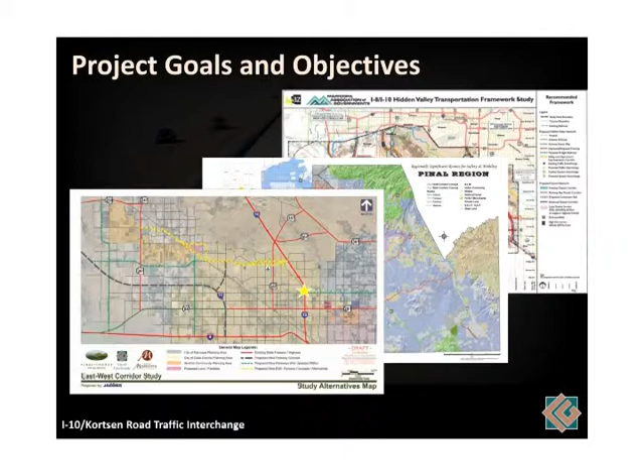It starts with various planning studies. Regional planning studies, such as the Hidden Valley Transportation Framework Study, look at general improvements in the area. The Pinal County Regionally Significant Routes Study is another study done by the county that looks at major improvements to the roads and streets. These documents are developed in conjunction with all the agencies, so Casa Grande, Maricopa, all the different communities are participating in how these planning documents are developed as to where the ultimate infrastructure will be located throughout the community.

Other studies we've worked on include improvements. Some of you may have been involved with some of our planning meetings for the east-west corridor. It's a parkway that's going to be located a little bit further to the north along Val Vista through most of Casa Grande and then ties into Maricopa. All of these documents provide us with some traffic modeling and traffic background that gives us the traffic numbers for how we're going to be looking at what kind of improvements are going to be necessary for the foreseeable future.

The goals and objectives of this study are simply to make linkages between the east and the west sides of I-10 through the city of Casa Grande, to provide an uncongested local alternative to Florence Boulevard as Florence continues to have more traffic, more development, more delays. So this becomes a great alternative to that particular street.

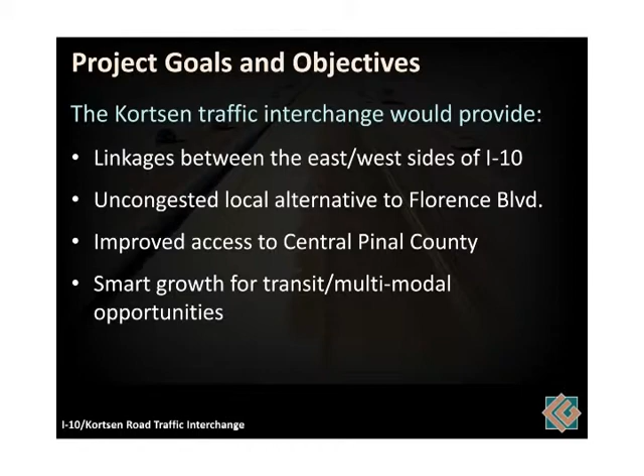Improved access to central Pinal County. Kortsen would become one of the major arterials that would continue to provide access to the east and to the development and growth of Pinal County. And then we're not only looking at highway improvements, but multimodal improvements as well, making provisions for sidewalks, making provisions for bicycle lanes, making certain that those other provisions are incorporated into the ultimate plans as well.

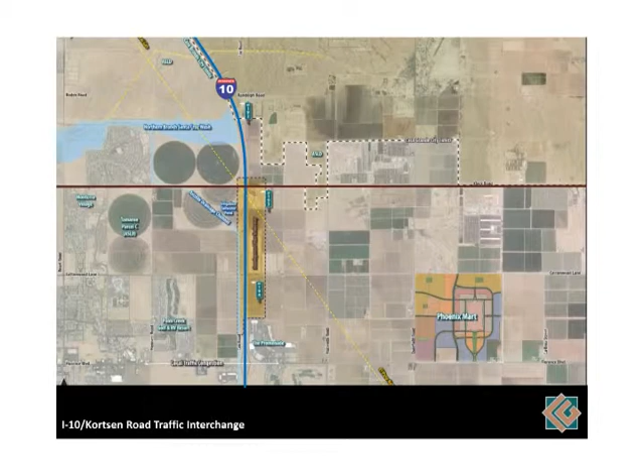Let's get some lines on there. There's I-10, there's Kortsen itself. Our focus is the improvements about a mile on either side of I-10, and what type of interchange facility, what kind of access would be provided at the interchange at Kortsen. That's the focus of what we're looking for and what we're here to present.

We've been following a process. That process is a federal process that helps us gather information from communities. We start with preliminary data collection — taking existing studies, existing plans from the cities, the counties, the communities as to what's being proposed for improvements, tying that into a traffic model, and seeing how the traffic would operate not only today, but in 10 years, 20 years, and beyond as to when that need will be necessary.

We're developing an environmental overview document — actually something that will be described a little bit further, a planning and environmental linkages document that allows us to look at some of the environmental elements now, which can be used in the ultimate decision as to when these improvements are built into the future.

All of that preliminary information is used to help us come up with some draft alternatives. We came to the community in the past through some similar meetings, asked for feedback from the community and the agencies as to where these alignments should be located through public scoping. Through that scoping process we get your comments, and we've refined these alternatives. What we're going to be showing you tonight is basically the recommendation for this particular intersection location.

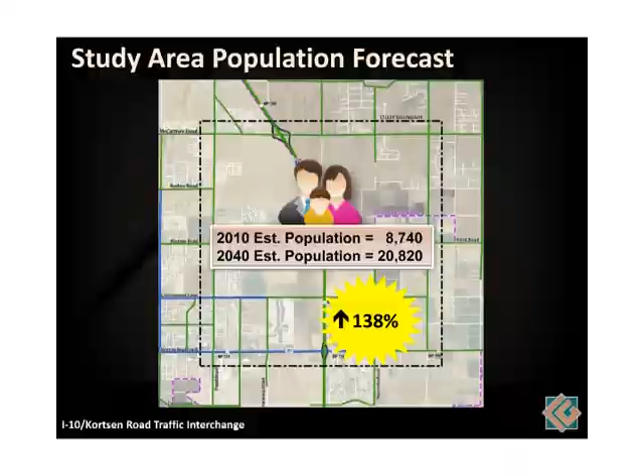In terms of how the changes are occurring, many of you are familiar with this, but the change in population - there was a lot more growth a few years ago, and that slowed down, but it's still continuing. From 2010 to 2040, even with the slower curve, we're still seeing a population of nearly 21,000 people by 2040, a 138% increase. We have to make provisions for that, and our traffic models are consistent with the rest of the planning going on in the county and city to match that type of growth. Those models are constantly being adjusted.

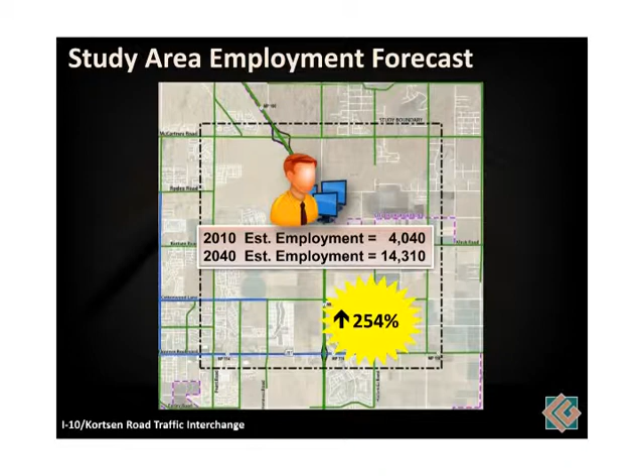This is the current growth projections we're seeing. Estimated employment is projected to continue to grow, occurring on both sides of the freeway. That's one of the major reasons for having some of these additional access points for I-10 - an increase of 250% on employment.

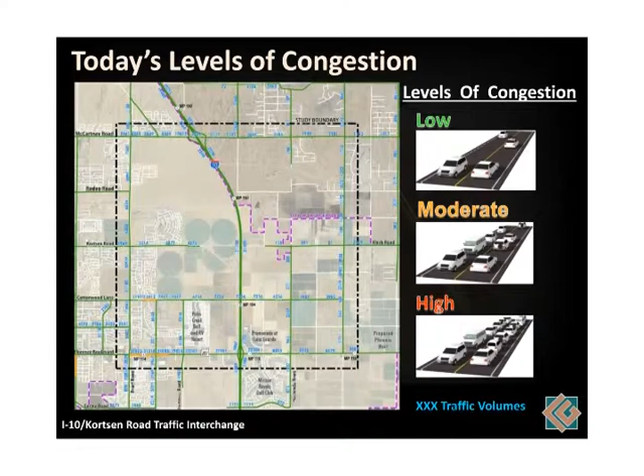Congestion, levels of congestion - if we look at what traffic conditions look like today, it's a working network of streets. You can't say it's heavily congested today, but as growth continues, those streets will become more burdened, and that's what we're trying to make provisions for.

We tend to look at that in terms of low, moderate, high. We design our facilities for about 20 to 25 years into the future. That's why we try to set the goal for how these new improvements will be going, and that's why you'll hear me use the year 2040 a lot in this presentation - that's our goal, what we're trying to make these facilities fit.

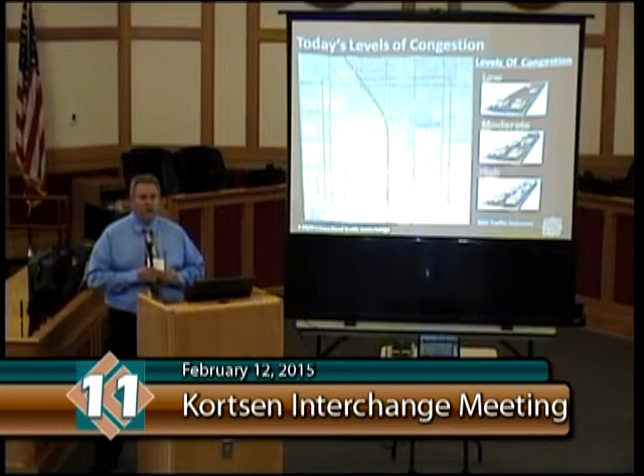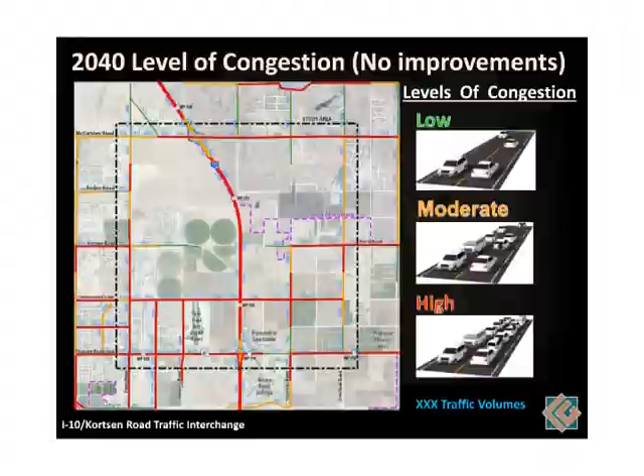The 2040 level of congestion on the map is if we make no changes to the existing infrastructure and just keep the existing streets - most streets get a red mark, and you'll see there's no crossing on this map at Kortsen. This is the condition if everything simply stays as it is today - there would just be more traffic.

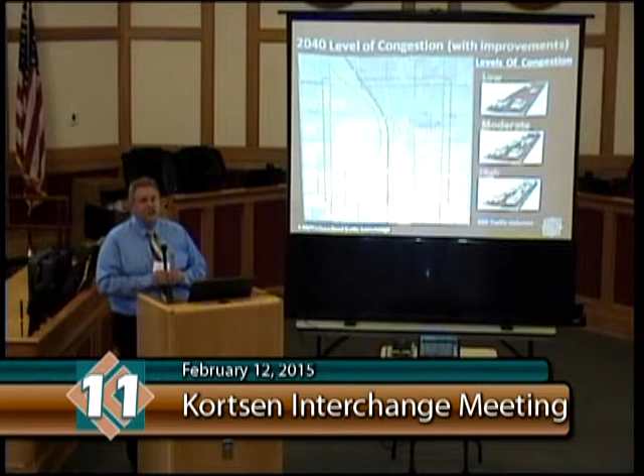So we come to a condition of high congestion level, and that's why we start to look at other opportunities, other improvements. If we were to build the improvements at Kortsen, you see with that same future level of traffic, all the lines suddenly become green. It's because everything is allowed to balance - there's no big spot in the middle blocking access where everybody has to go around. So it provides a lot of opportunities, not only for direct access to and from the freeway, but to cross the freeway. That's one of the big goals of this project, to give access to both sides of I-10.

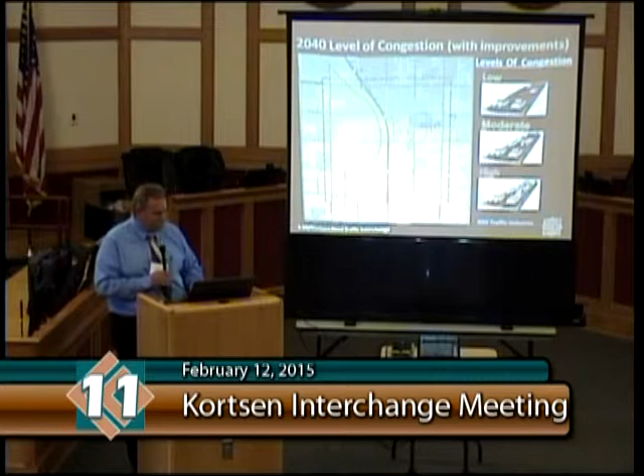One of the elements we've included is an environmental overview, and I'm going to let Beth describe the environmental elements. We had a public meeting here in July and went through the environmental details in a fair amount of detail, so we've condensed that for tonight. We did prepare an environmental overview - if you're interested, it's available on the website identified here, and it's also in some of the meeting materials you have tonight.

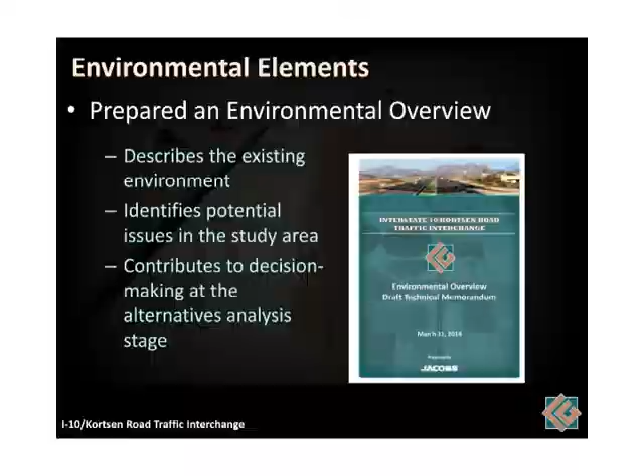This was largely a review of existing information through literature. There was a little bit of field work done, but it was fairly minimal, so it was mostly based on what's readily available. All of this contributes to that decision-making process.

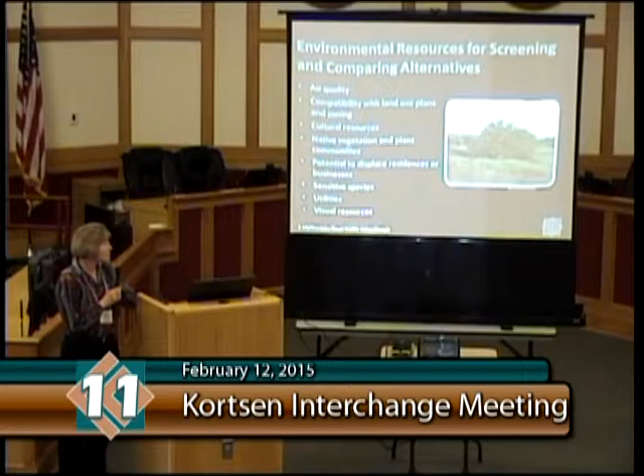This provides a laundry list of some of the resources that we look at. We look at natural resources such as biological issues, whether there's any protected species, any water. We look at cultural resources, historic sites, archaeological sites, and we also look at the human environment, which would include things like land use and any protected populations.

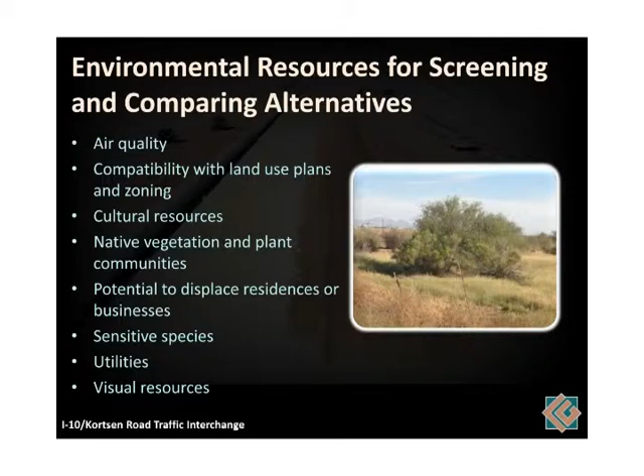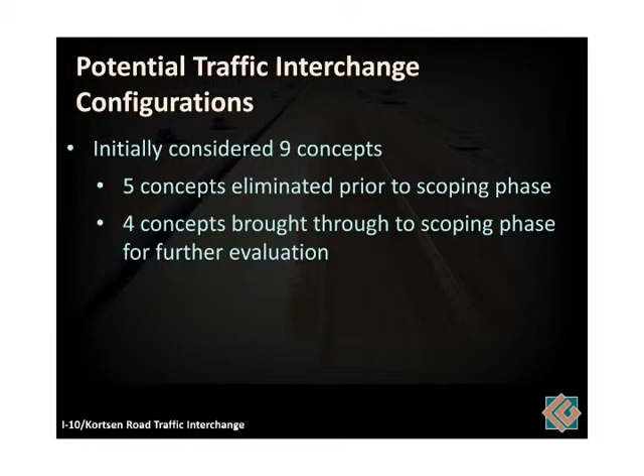We mentioned that a lot of our attention is really focused on what type of interchange you're going to be constructing. One of the things we had to go through with this process is we had to make certain that we considered all viable alternatives. Some of these alternatives you're going to say, well, that just doesn't make any sense. Well, we thought of them, we wrote them down, we said we considered them, and they don't make sense, so we checked them off the box and moved forward. As we get down to the smaller, more preferred, more viable alternatives, then you start having to do a little bit more work.

For those, we looked at overall about 9 different concepts. All of you have a driver's license, so you're all traffic engineers, and you all know how to drive the various different types of interchanges, and you all have your pros and cons as to how they work.

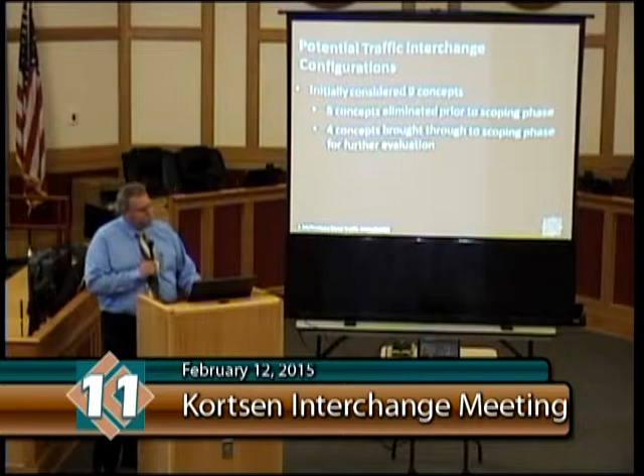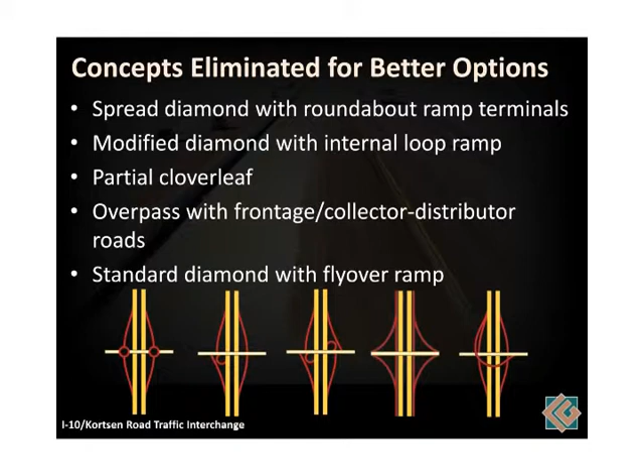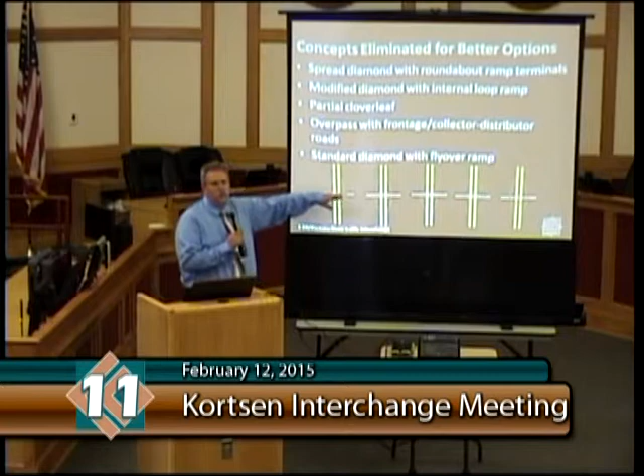The concepts that we eliminated diagrammatically are shown on the bottom of the screen. We looked at interchanges with roundabouts at the terminus of the ramps. Doesn't fare well when you start shaking your heads no back there, okay? We've already gotten rid of this one, that's okay. But they have their place, it's just that it doesn't work for this particular intersection, in particular since we have so much east-west traffic that wants to cross I-10.

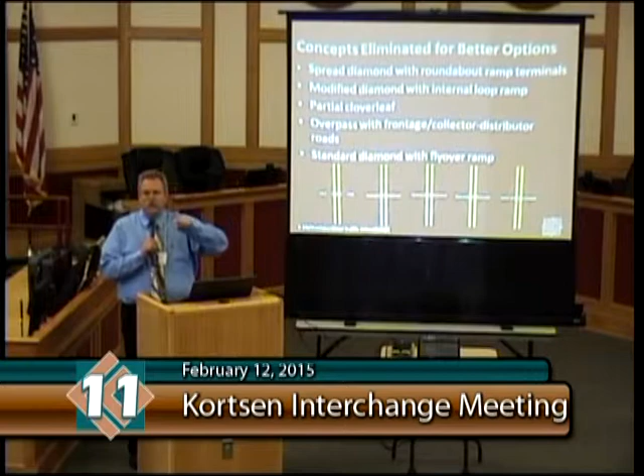We've looked at interchanges with ramps. Federal Highways is trying to get away from ramps because that's usually where you see people turned over on the side because they went too fast through the ramps. But they have their place.

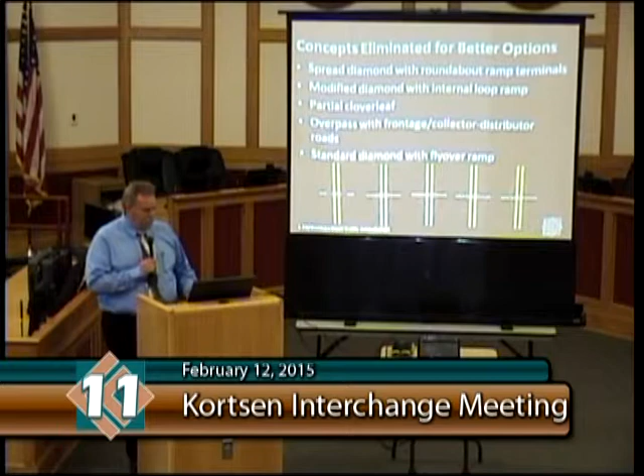We looked at putting frontage roads between McCartney and Florence and looking at not putting another interchange, or simply accommodating it with additional frontage roads. And we looked at loops and ramps that bypass or go over. Now, granted, there'll be a lot of left-turning movements, but we don't have to have a system interchange, we don't need separated ramps. So those are all being eliminated as general concepts.

The 4 that we narrowed it down to are ones that you're likely familiar with, and one that you're perhaps not familiar with, but we did consider.

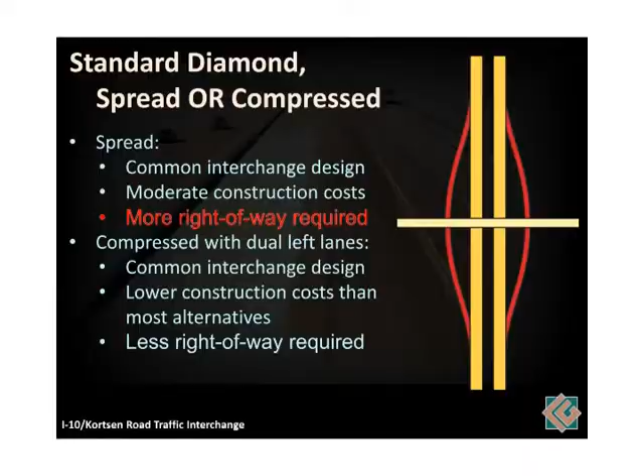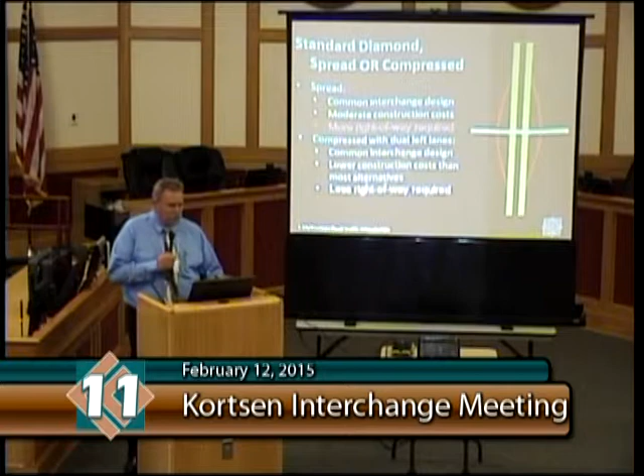The standard diamond or the spread diamond, that's a prevalent type of interchange used throughout the state. It's common, everybody knows how to drive it. The difference between the two is as we bring the ramps in, the bridge is the same length to cross the freeway, but if we want to keep our right-of-way impact to the sides to a smaller amount, we have to build the ramps on taller walls or a taller profile, so we introduce a little bit more structure, a little bit more cost. If we spread it out, it's a bigger interchange, but we have a bigger right-of-way footprint, so it has a little bit more cost with acquiring that land. But they both operate fairly well and fairly similarly, so the spread diamond just simply has more right-of-way component.

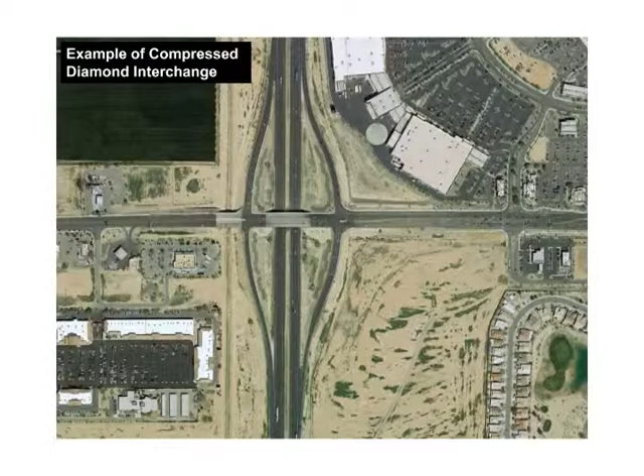If we look at the promenade where Florence crosses, it actually has somewhat of a spread crossing to the east and a more compressed crossing because of the drainage channel on the west side. So that's a little bit of both, it's a great example. But the crossing over the highway is comparable to a lot of interchanges you're used to seeing, and that's what we're looking at proposing.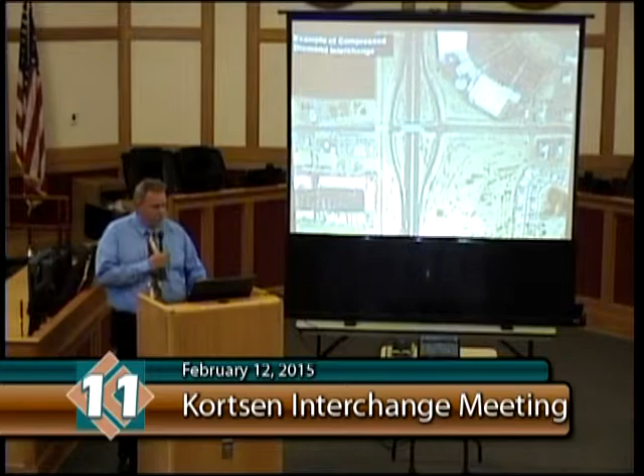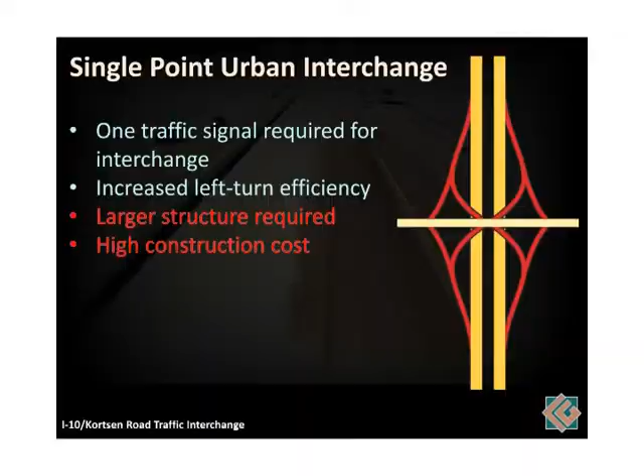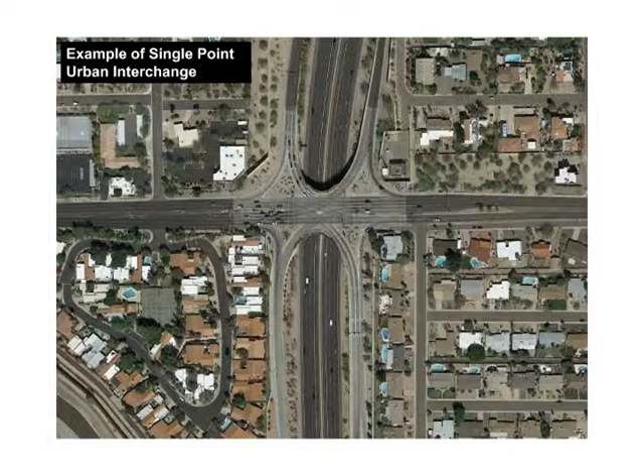Another type we considered is called a single point urban interchange, or SPUI. If you're used to driving I-10 around 7th Avenue or 7th Street in Phoenix, a lot of the ones on 51 are these SPUIs. In an urban environment your freeway is pretty narrow, so building this huge concrete mass over the top of the freeway is a cost-appropriate solution because you're already in an urban, expensive right-of-way. It's more expensive to build wide, so you just build your infrastructure over the freeway.

In our particular location we've got a divided rural freeway. Although it's a 6-lane freeway today, we have to make provisions for a 10-lane freeway in the future—5 lanes in each direction, not 10 lanes in each direction. So they're going to add 2 more lanes eventually, but not right away. We have to make provisions for our bridges because we don't want to build a brand new bridge and then have it expanded in the future. So great idea, works great for left turns, just really expensive to build.

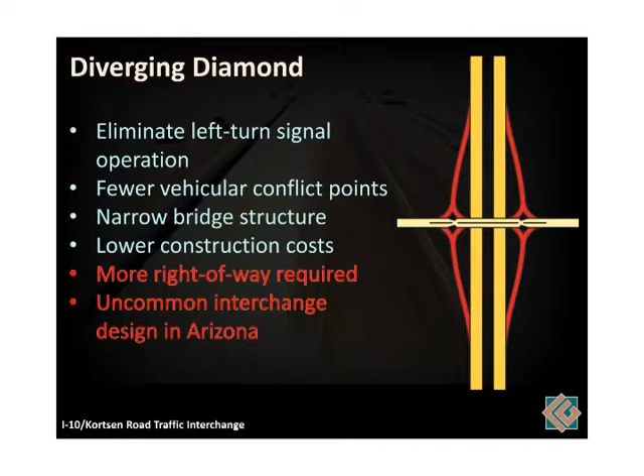There's a new concept coming across the United States, used a lot in rural areas. Utah is building several of these, and I saw some in Branson and other places. It's a different concept called a diverging diamond. The neat thing about a diverging diamond is there are no left turn lanes on it—you make the left turns after the bridge.

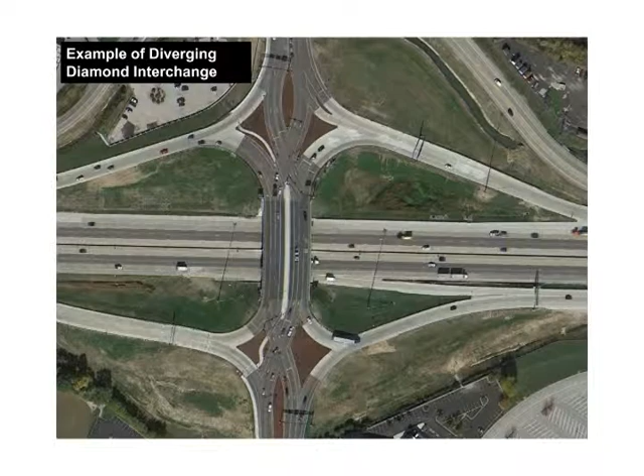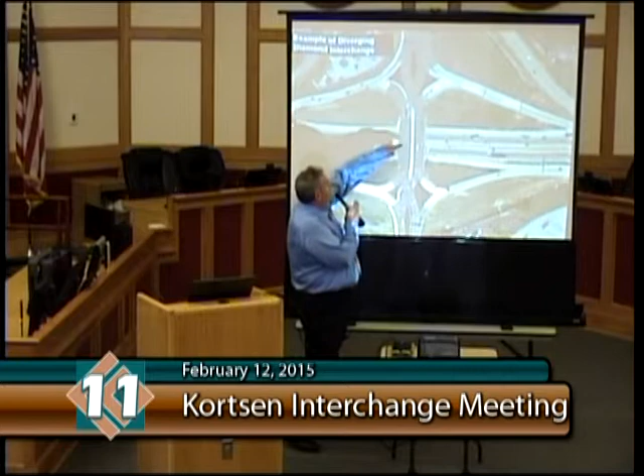It might look a little silly if you've not seen one of these, but normally you'd be coming to the interchange on the right-hand side. As you go through the interchange, you shift to the other side. Now there's no longer a need to have a left turn lane in the median—you can make a left turn straight onto the ramp, and your right turn is made straight onto the ramp. So there's no reason to have a left turn lane in the middle of the bridge. What that saves is the cost of the width of the bridge for that extra lane.

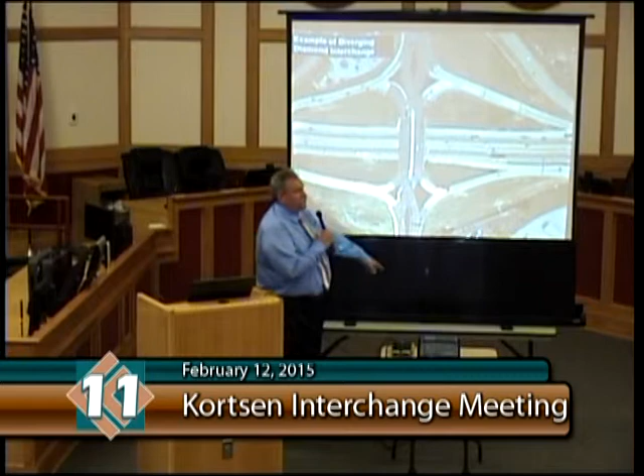What you pay for is that some people can't handle the change, and a little confusion occurs at the interchange. Also, for us at this particular location with Kortsen, we have a lot of traffic that just wants to cross the freeway, and this design really slows that traffic down. So while the benefit of this bridge is it's shorter and narrower, it does require more right-of-way on the approaches—a bigger footprint to accomplish these ramps—and it doesn't handle our traffic in the long run as well as some of the more traditional approaches.

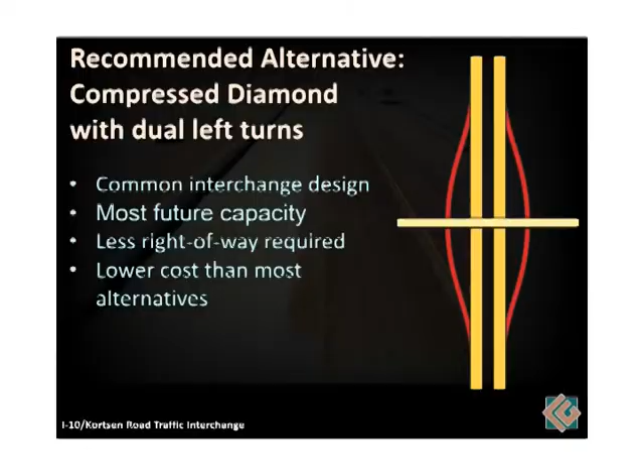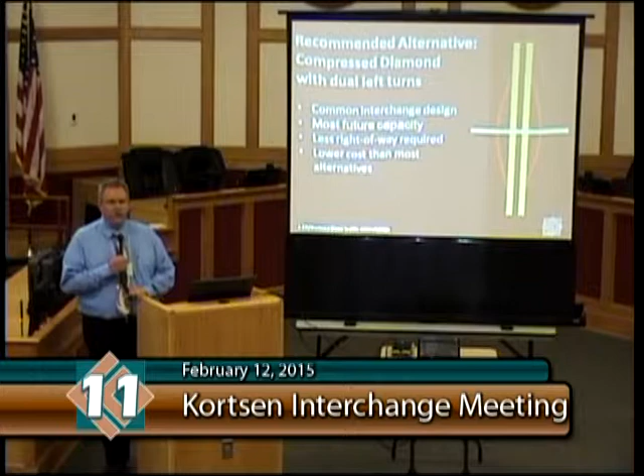But you can see we tried to consider every viable alternative and went through these different concepts. So what we're recommending is a pretty standard interchange by Arizona standards: the compressed diamond with 2 left turn lanes. That's the ultimate footprint we're recommending. We believe that initially a single left turn lane and just 2 through lanes in each direction would be all that's constructed, and that'll last for a good 20 years. Then in the future that could easily be expanded to provide the additional lanes as we need to grow.

Again, just the standard diamond that you see up on the screen there. This one just has symmetrical ramps.

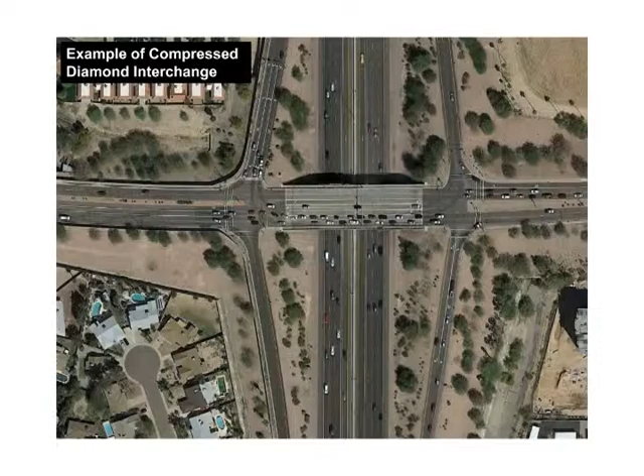The Arizola canal that crosses Florence doesn't actually impact us as much at this location because the channel starts to come off to the side, as you can see on some of our maps. So it doesn't really impact us.

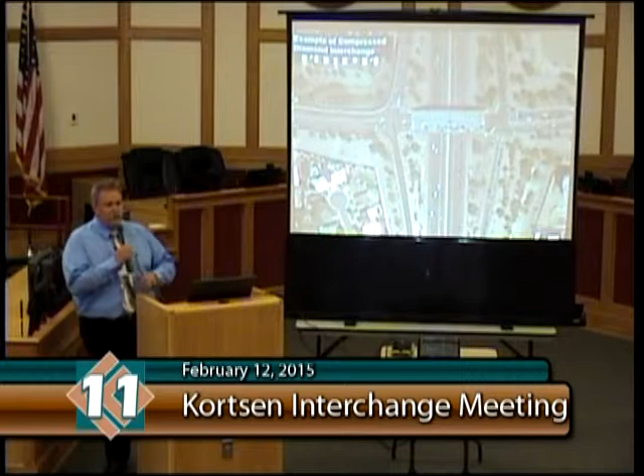One of the only challenges we're still trying to figure out, as part of the infrastructure improvements planned for Kortsen Road, is how local trails cross through the area. There's a local trail path that parallels I-10 on the west side of the freeway, and we're trying to look at how we efficiently get that trail to cross Kortsen when Kortsen has to cross over the freeway.

So do we have the trail simply bring access up to the top and make the crossing at the signals? Or do we consider putting in a box culvert and allowing the trail to continue at grade and go underneath? Both are good solutions. Those are some things we still have to work out, and we'll be working with you on those.

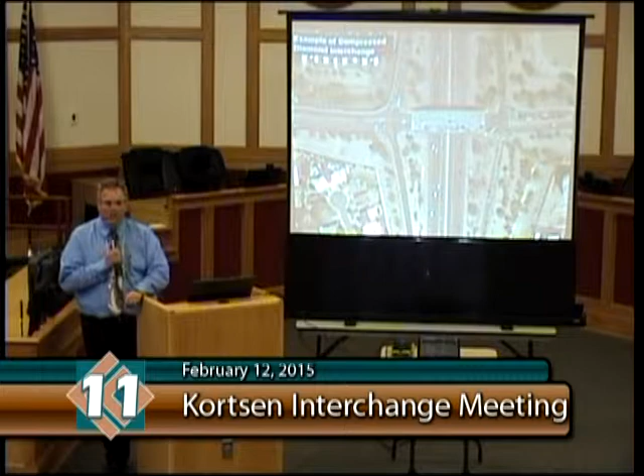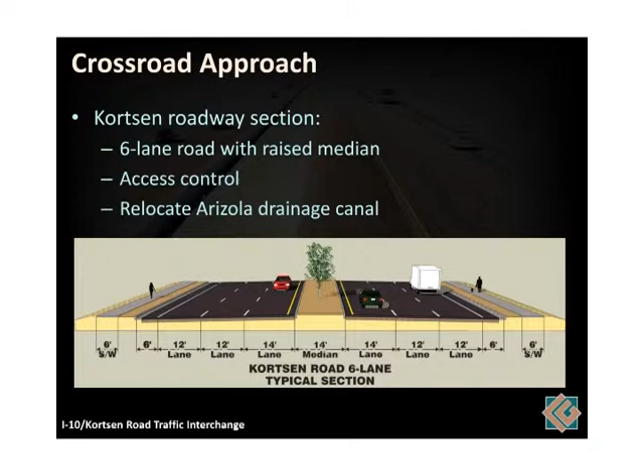So the crossroad itself is a standard arterial, being consistent with other streets proposed in Casa Grande, going with that same plan. We're showing a 6-lane section as to what it would ultimately be, but it would likely only have a 4-lane facility constructed at first.

What's being proposed is that we typically build these types of improvements now by building the outside lanes first, so we don't have to change the disturbance to the landscape and the access points as the development's completed. When we need more lanes, we simply build to the middle and add the additional lanes, and take care of it in that location.

So that's the type of street. If you were to say, gee, what does that look like? Approximately like the two modeled simulations that we have on the page here.

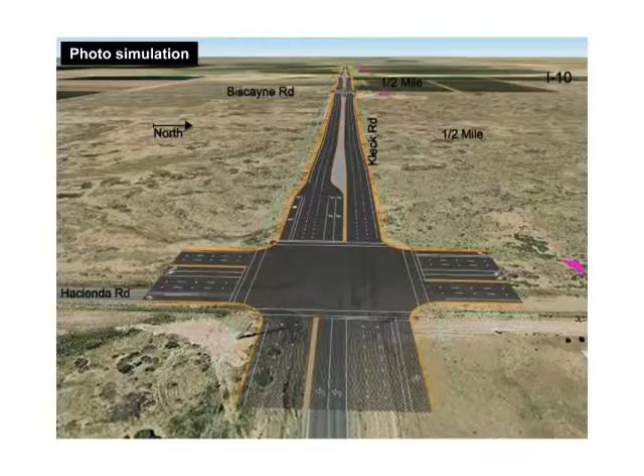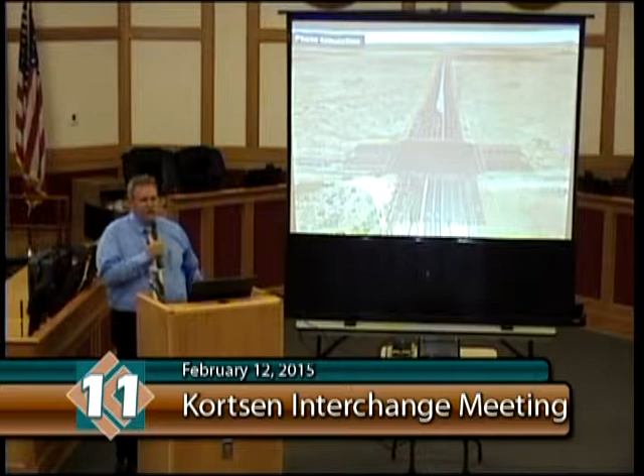This is looking from the east towards I-10, and it's pretty flat—pretty much your basic arterial street. There's not much infrastructure there to compare it to right now. The access points are similar to what you would find on most other streets, what you would expect in terms of tying into an arterial.

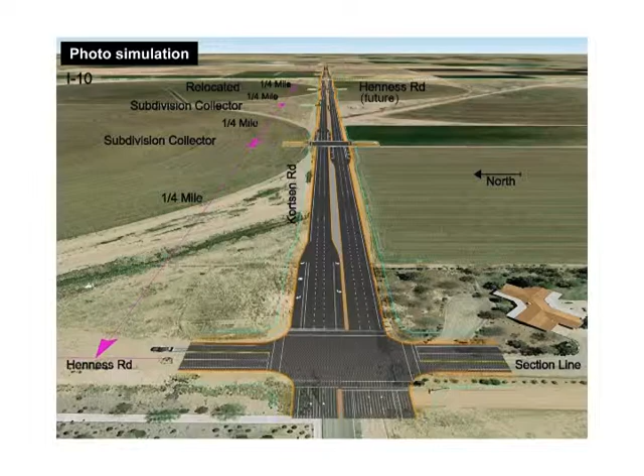This is looking from—if you're familiar with how Henness comes up—this is... I forgot the name of the subdivision. Everybody else knows it. Palm Creek, thank you. Okay, so we have I-10 up at the top, and this is at the tie-in there.

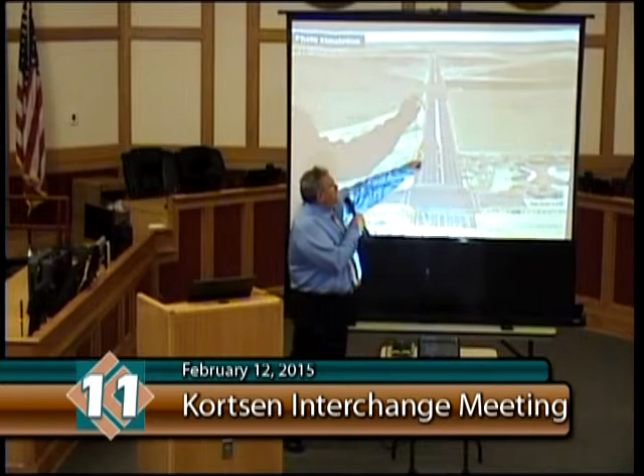You can actually see the Arizona channel coming through right here, comes up, and then continues on its way. That channel is being proposed to be relocated further to the south, then crossing through here. So this is just a concept to show what that 6-lane facility would look like—basically on the middle of the section line, a straight extension of the other arterials from either side.

We mentioned before where we are in the process overview. When you see these pictures and say, well gee, we have a plan, we have a concept—it's not going to be real easy to go from this point to construction. The next big challenge is to find a means of a funding source.

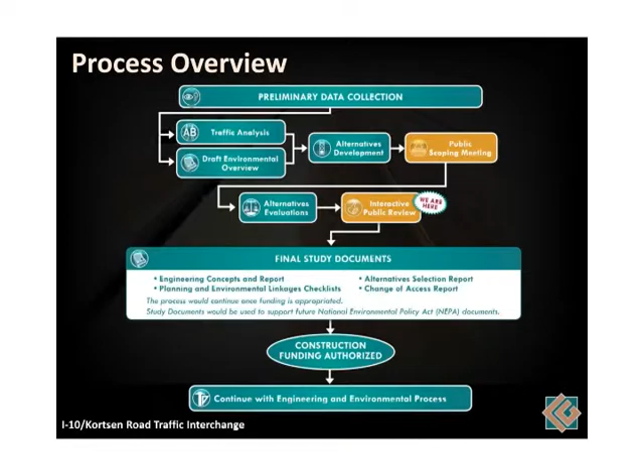Once that funding source is found, then we can work to get the final plans, the final environmental document, and put the rest of the improvements together.

When this study is finished with this document, you'll see the necessary improvements, the cost, the environmental consequences or impacts—whatever potential impacts. That all gets wrapped up into a document that helps us understand what these ultimate costs would be.

At the beginning, I asked you to fill out a comment questionnaire. If there's anything here we've talked about tonight that stirs you to say, gee, how would you do this, or would you consider incorporating this—this is the time for you to bring that up, so we can still incorporate your thoughts and concerns into our study documents and the improvements.